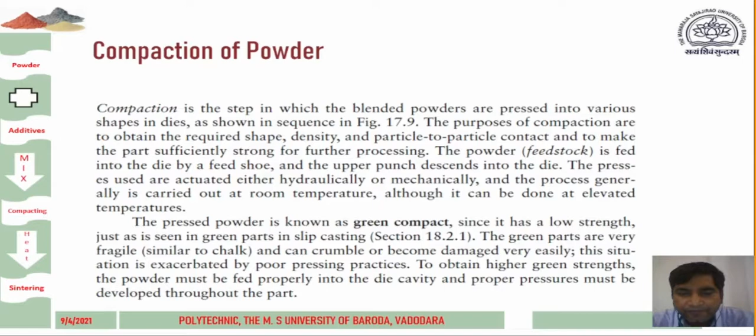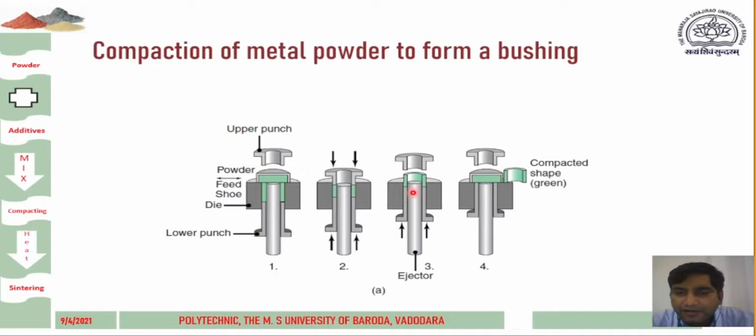Different methods of compaction include isostatic pressing. Isostatic means iso meaning constant, static meaning fixed, non-moving. So the green compact may be subjected to hydrostatic pressure in order to achieve more uniform compaction and hence density.

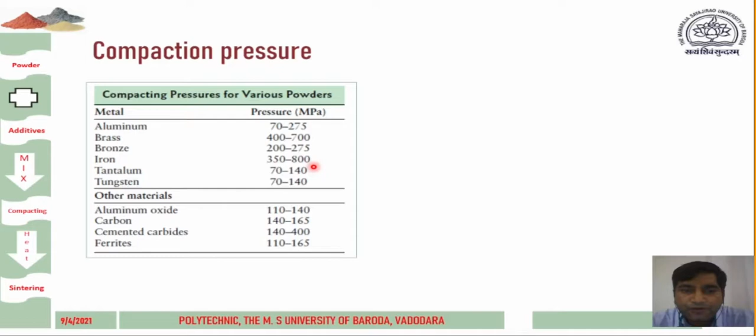Next process is hot isostatic pressing. The only difference is cold to hot. Here the container is made from steel instead of rubber, and the pressing medium is high temperature inert gas.

What is the difference between cold isostatic pressing and hot isostatic pressing? There the mold is made from rubber or flexible material. Here it is different.

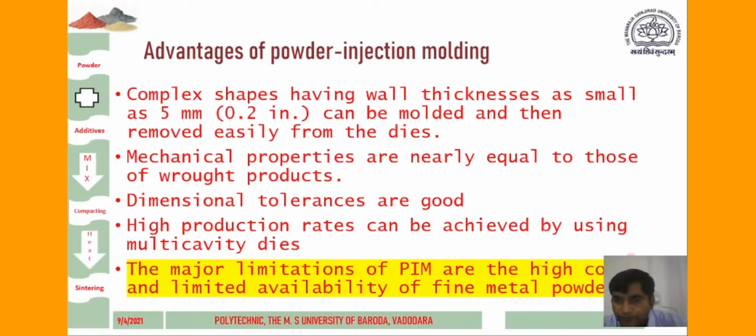One of the limitations is the high cost and limited availability of fine metallic powders.

Other processes used for compaction are forging, that is powder forging, rolling called as powder rolling, extrusion, pressureless compaction, and spray deposition.

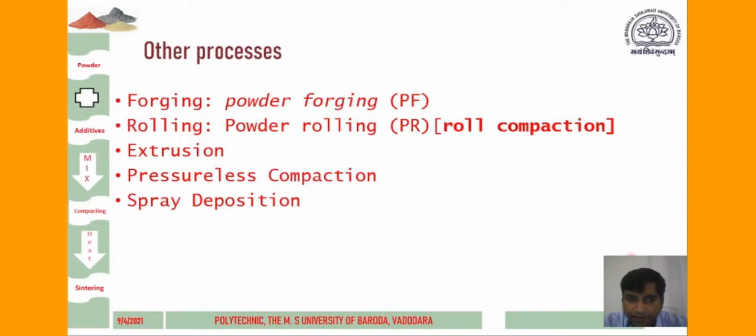In another case, spray deposition, you have a base metal on which you need to develop a very thin deposited cover coating, and this is done by hot or powder spraying method.

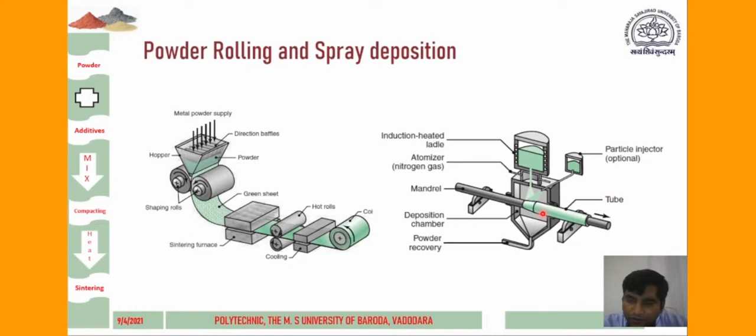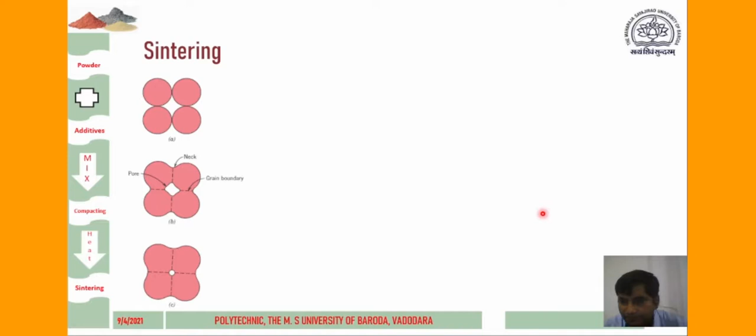Okay, so these are the discussions related to compaction. Now we'll continue with sintering. Compacting: cold isostatic pressing, hot isostatic pressing - so these were the compaction methods.

After compacting, what is obtained is called a green compact, or the part is called a green part, and it has very low strength. It is just bonding, the particles are just bound with each other, but they are not able to get sufficient strength for the functioning purpose. Therefore, the next stage in powder metallurgy component manufacturing is called the sintering process.

So you are seeing the picture of particle bonding on your screen, and the particle bonding is showing you some changes. The first figure shows four balls representing the particles of the powder metallurgy compacted component. The second is showing the increase in bonding area.

If you see, you have a very small bonding area, that is the contact area is less. The second figure shows that this bonding area is slowly increasing, and the central porous part, the non-contact part, is decreasing. The third figure shows that almost everything has bonded and only a small point of porosity remains. This is the process, the phenomena that takes place when we put a part in the sintering process after making a green compact or green component.

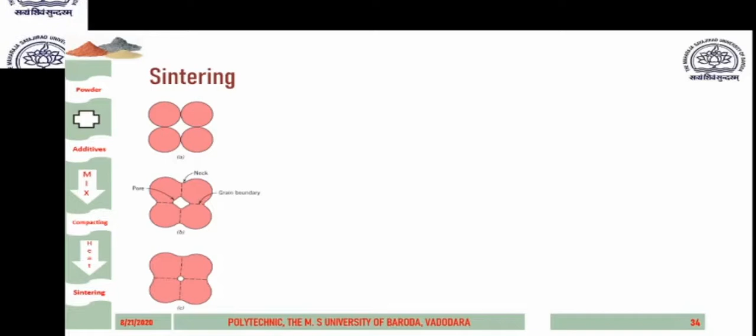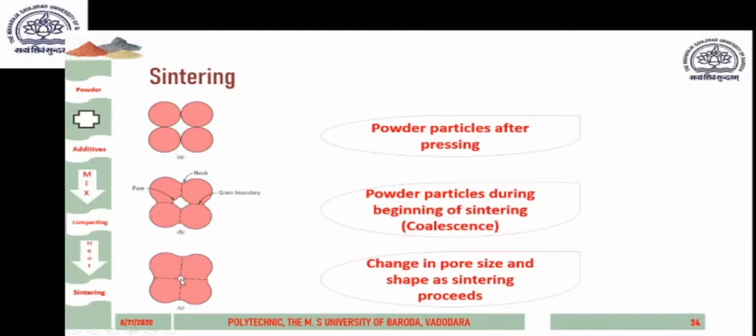Okay, so just look at this - what are these? Powder particles after pressing, powder particles during the beginning of sintering, where coalescence is occurring. That means different areas, different points which were in contact have started melting and getting associated with each other. And the third is the change in pore size - this is the pore size which gets reduced as the sintering process proceeds.

So this is what happens when we do sintering, and it is expected to be done very nicely so that we get a very good strength of the material particles in the bonding condition, the metallic bonding condition, and the material can be used for performing the required function with the required physical and mechanical properties.

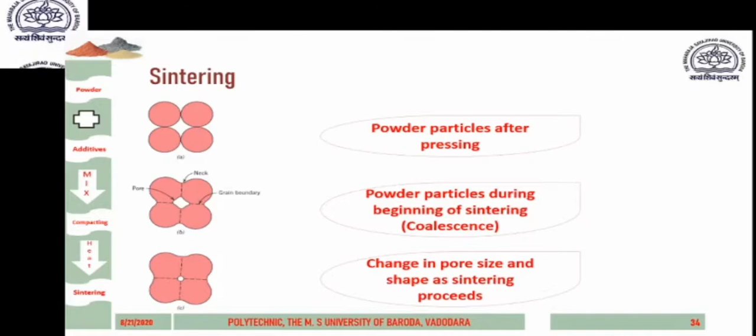Now, what is sintering? In simple words, sintering refers to the heating of the green compact in an oven. The heat is supposed to join various grains, that is metal powder, into a single mass, thus developing the necessary strength. The strength obtained in the process depends on the temperature and the time the powder compact is kept in the oven - different metallic powders are required to be kept in the oven for different times. So all green compacts do not have the same sintering time.

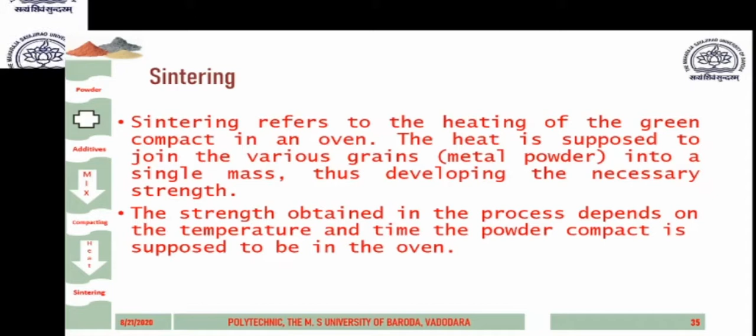So sintering time is different for different materials and different properties that we desire to build in the material or component that is manufactured.

So what are the different components of the sintering furnace? The sintering furnace is generally conveyor belt mounted. There is a furnace and a conveyor belt which is constantly moving at very slow speed.

What will be the speed of this belt? Almost 1 meter per hour, or still less than that, because what we have is a compacted part.

Last time we saw a video showing how the compacted part is sent to the furnace. It is an inline, continuous process. Your job is placed on this conveyor and it goes into the furnace. The furnace starts from this point and is quite large, almost 5 to 10 meters long.

This part is called the preheat zone, where the temperature is around 250 degrees, so that moisture, gases, lubricants, oils, and other things present in the green compact part get evaporated and removed in this section.

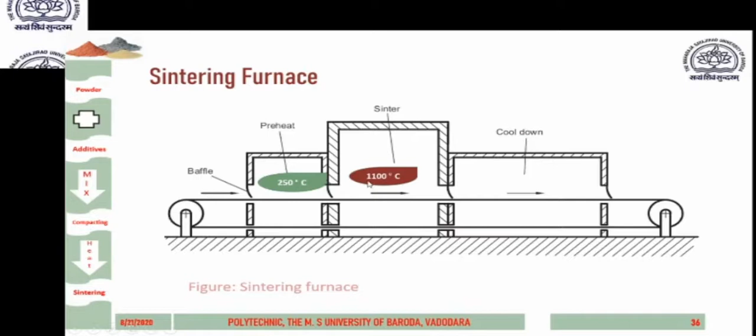We are talking about different temperatures for different materials. Brass generally gets 850 degrees centigrade with a typical time of 25 minutes. Bronze gets 820 degrees, time again 15 to 25 minutes. Iron sees 1100 degrees for 30 minutes. Stainless steel, 1200 degrees for 45 minutes.

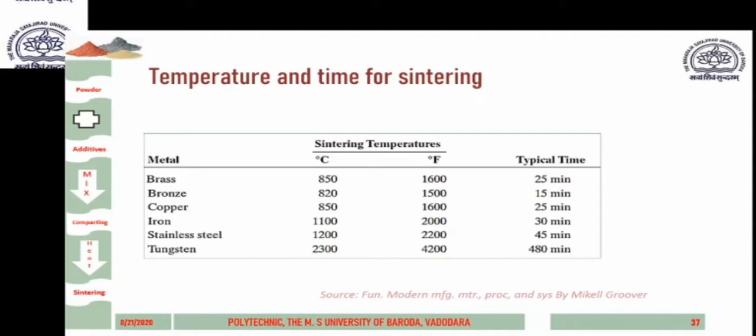Tungsten: 2300 degrees centigrade and 480 minutes, that is 8 hours. So in this way we get this time and temperature cycle, and these cycles must be performed and operated properly to get good quality jobs from the powder metallurgy green compact.

The furnace has three zones. You can take notes of this: preheating, sintering, and cooling zone. For steel, sintering temperature is around 1100 to 1200 degrees centigrade, and for copper it is around 800 to 850 degrees centigrade.

The strength achieved by the sintering process or by the component after sintering depends on the sintering temperature. The trip through the furnace for a single part takes around 2 to 3 hours. That means starting from preheat, sintering and cooling, it takes around 2 to 3 hours or more as the part product component would require.

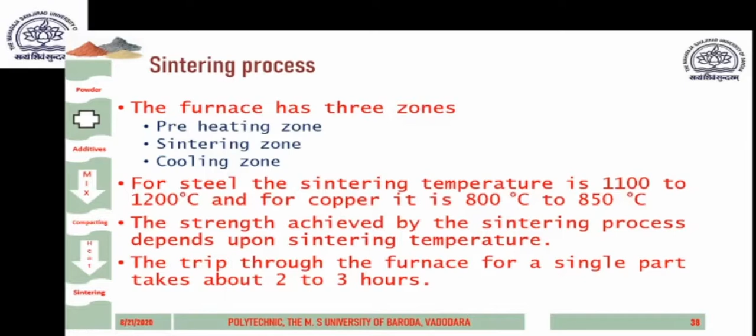Now sintering process. There are some secondary processes that are used along with sintering or after sintering. One of them is repressing. Repressing is performed on powder metallurgy components to increase the density and improve the mechanical properties. What is done? Like in our hot working process, when the part gets cooled off, we again put it into the heat bath or furnace so that it gets a temperature of red hot, and again we can work. Same thing is over here. Once sintered component is available, before cooling it is pressed in the press.

During repressing, the density of part is generally increased, especially if the as-sintered density is low. As sintered means whatever component you have obtained from sintering. If we want to increase its density, before cooling, when the sintering process finishes, the temperature is around 800 to 1100 depending on the material. So we take it directly and press it again. By pressing it, the particles become more compact, and compact means density increases. So this is done for increasing density, and by that we improve the mechanical properties. In certain cases where strength and other mechanical properties are required to be at maximum, repressing is used principally to achieve such densification. Further improvement is achieved by re-sintering, meaning after pressing we again sinter it, so that we get the final best quality.

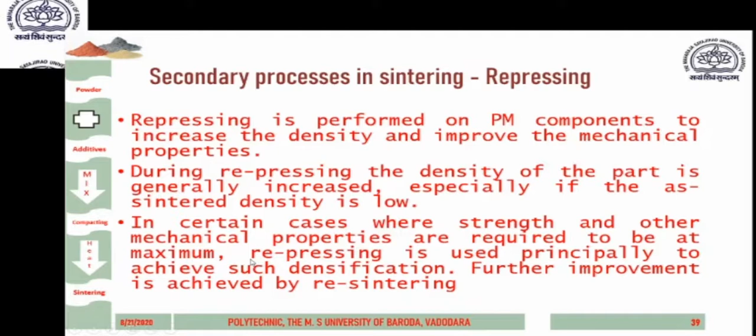Another secondary process which is done after sintering, or immediately with sintering, is sizing, which is performed to modify the surface shape and provide stricter dimensional control. That means if we want the shape and size of the component to be accurate, this process is used for that. Sizing is done in the die that was used for compacting the powder, in those cases where the dimensional change on sintering is controlled at or very near to zero. But commonly separate sizing tools are used. So there are 2 points in this statement: sizing may be done in the die which was used for making the green compact, or they may have special dies built just to confirm and make the required shape and size of the product after sintering. Generally another die will be used, because whenever it is green compact, the shape size will be slightly larger. As heating and sintering is done, there are chances the green compact may shrink, so that small amount of dimensional tolerance on the negative side will be available.

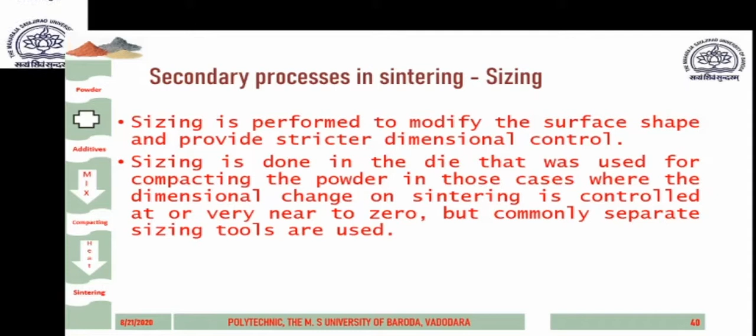Heat treatment is also used. Powder metallurgy components can be heat treated to improve strength and hardness, and can be steam treated to make the surface hard and more wear resistant, as well as contributing to improved corrosion resistance and sealing of porosities. So what are the different points in this statement? Heat treatment is done to improve strength and hardness. Steam treatment is done for making the surface hard, that is, surface hardness is improved by steam treatment, and wear resistance is improved. We also use heat treatment to improve corrosion resistance and to block or seal the porosity, meaning whatever porosity is visible on the surface, we fill it using heat treatment. We use both heat treatment and steam treatment.

During the quenching process, because of porosity inherent in sintered parts, they should not be immersed into corrosive liquids such as salt bath, water or brine, and only oil cooling is preferred. So if we do heat treatment on powder metallurgy parts and quenching is involved, as we know quenching, then to avoid corrosion effects we do not put it in salt bath or water or brine for cooling; we only do oil cooling.

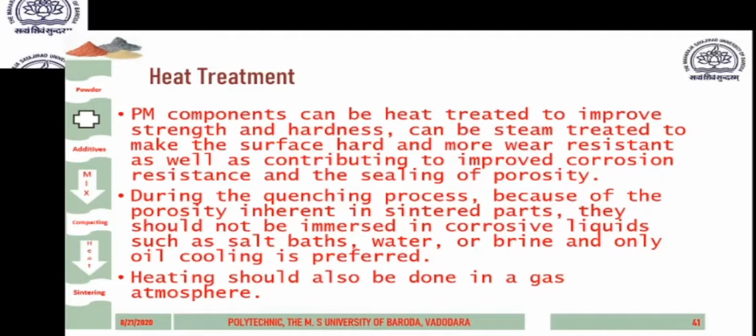Okay, so now we are moving towards the completion of the part, that is powder metallurgy. We have seen the powder metallurgy topic in four different stages: powder, blending, compacting, and sintering. So we have covered this chapter in four different stages, and finally the powder metallurgy component comes out after the sintering process. So what are the advantages of this process?

The powder metallurgy parts can be produced to the near net shape, requiring very little finishing operations. Near means exactly, net means required dimensions, with very little surface finishing needed. So generally no finishing operation is required after this, and if required, very little is needed.

It is possible to achieve a surface finish between 0.8 to 1.2 micron from a die with a surface finish of the order of 0.5 to 0.8 micron. So if the die's surface finish is good, we can get 0.8 to 1.2 micron surface finish in the product.

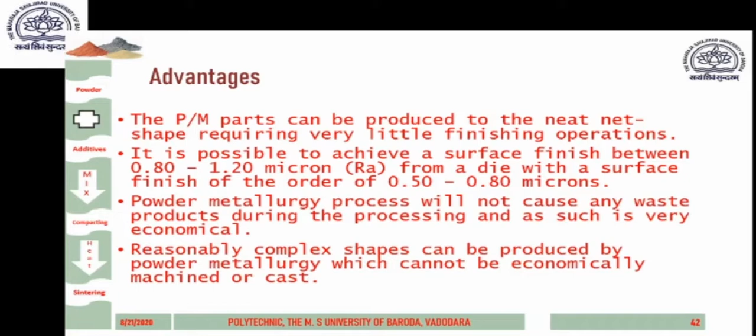Good complexity of shape, that is reasonably complex shapes, can be produced by powder metallurgy which cannot be economically machined or casted. So for typical cases where machining or casting is not possible, or complexity is higher, such components can be made well by powder metallurgy.

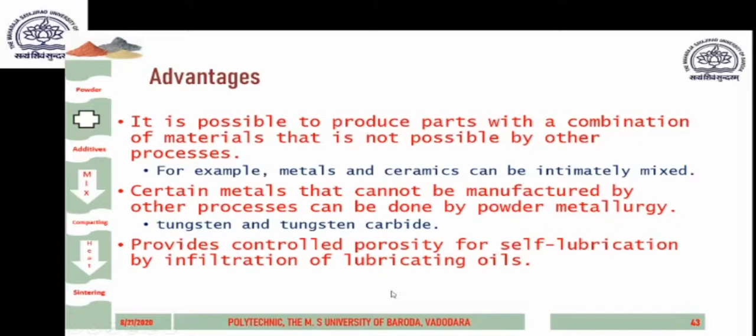So the limitations: the tool cost is generally high and therefore can only be justified for mass production. Raw material cost is high. Because of the presence of residual porosity, the mechanical properties are inferior, that is somewhat lower, compared to cast, machined and forged products.

Okay, so this is about the process of powder metallurgy. We have covered the complete chapter in 4 parts. Finally, we have seen some advantages and limitations in the initial stage, in the first few slides. I have also explained the applications of these products that are manufactured by powder metallurgy.